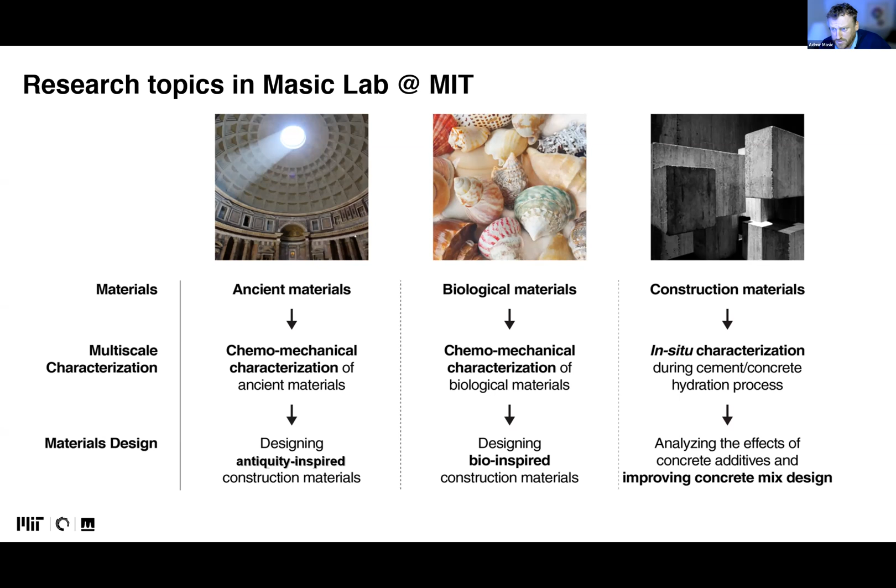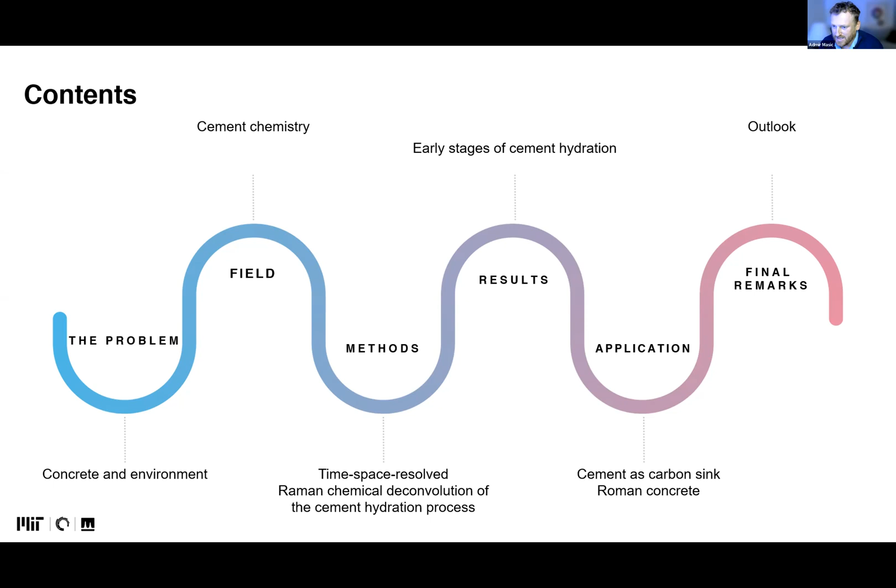So this is my outline, and fortunately there were so many amazing talks today that introduced the problem and talked a lot about cement chemistry, so I will probably fly over most of the introductory slides, and then focus on time-space resolved Raman chemical deconvolution of the cementitious hydration process, which is the method I will present today, and show some results and applications. If we find time, depending how fast I go through these previous modules, I hope to present also some very recent results on Roman concrete structure and properties.

So we learned today that concrete is an outstanding material, and from many talks we realized that we are not gonna go far from what we have now. The reasons are clear: it's strong, durable, and versatile material, and most of all, it's extremely cheap compared to other materials. If you think of, let me just see a pointer, here we go, if we talk about the relationship of cost versus strength, concrete is just great.

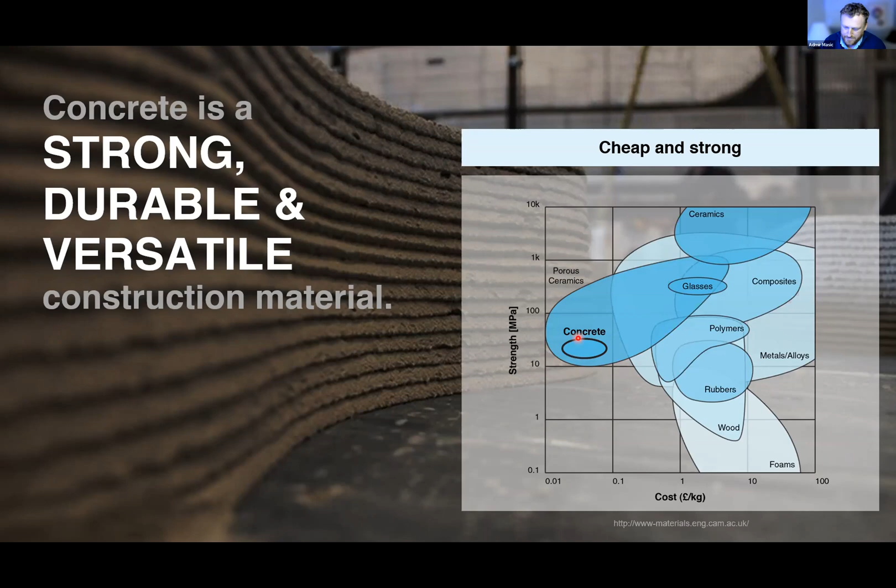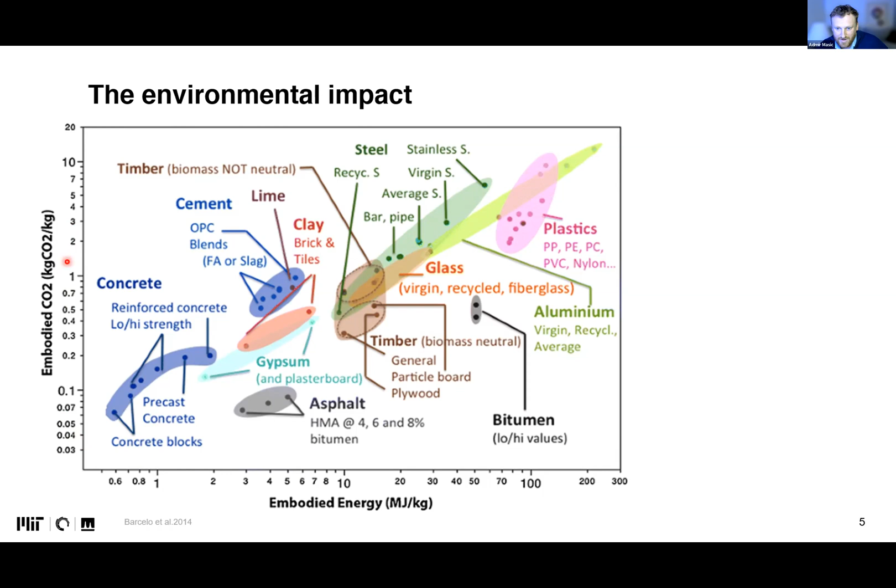Of course, we have seen this slide already in Karen Scrivener's talk, and it's a great material indeed, even from the footprint standpoint. It's on the left bottom side of this logarithmic graph, so remember, logarithmic means huge differences, so it's a great material even from this side. But of course, if we then look at the tons of material that is produced, unfortunately these even small numbers here become extremely high and of big impact globally.

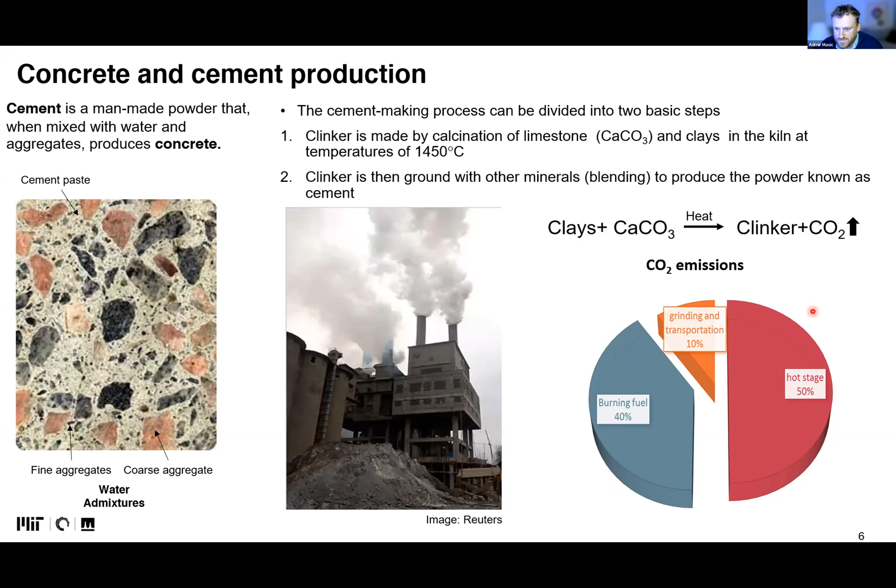So, yeah, we know very well now after this conference, I think, where this carbon footprint comes from. Of course, it's calcium carbonate, limestone degradation that leads to the emission of CO2, and these emissions combined with burning of fuels and some cost for transportation and grinding, in terms of CO2 equivalents, lead to that impact. And the temperature is very high to calcine and produce the clinker, so that's a very, very CO2 intense process.

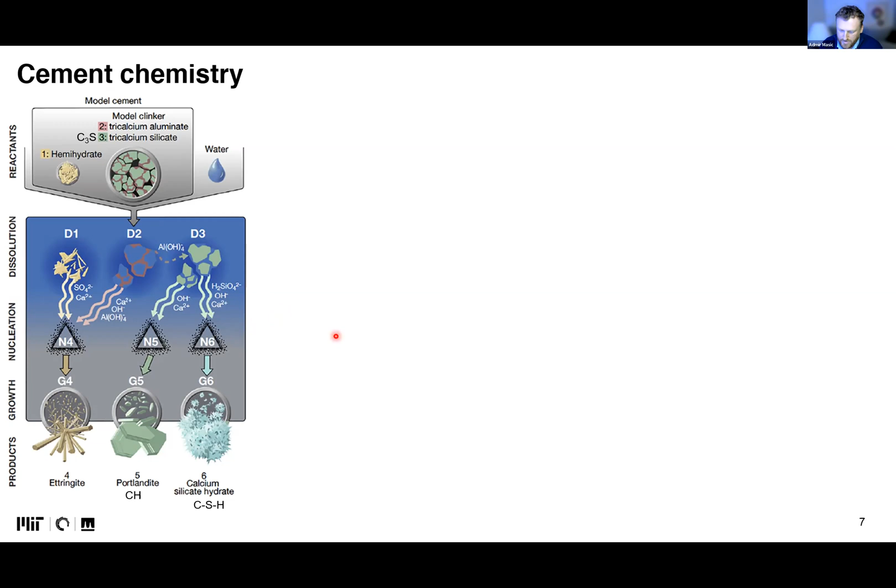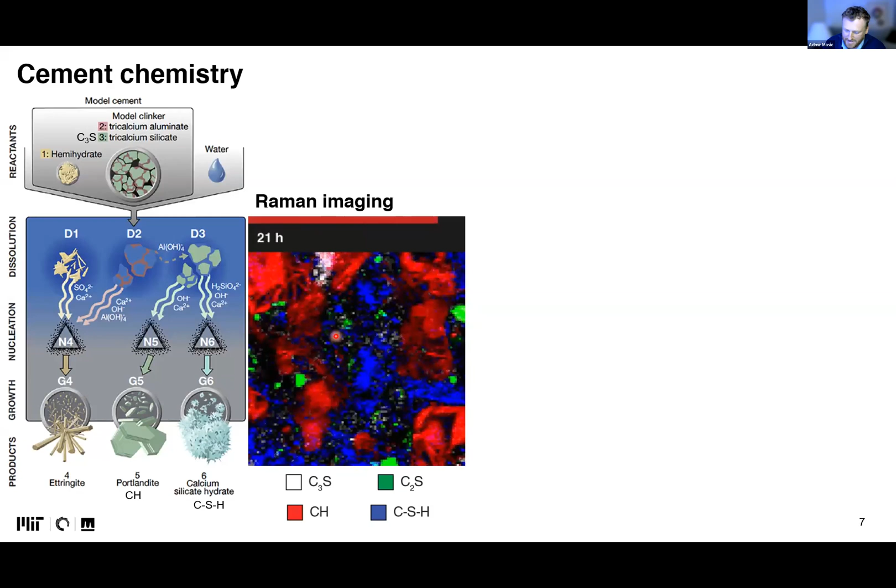The problem is that our modern ordinary Portland cement then takes a route of hydration instead of carbonation, even though you already learned today that carbonation occurs as well. But in theory, what we aim for is this calcium silicate hydrate that will give us the strength, and of course some other products due to additives like gypsum, and there is also belite and so on. We know quite well the chemistry, and it's interesting that we don't know much about early stages of hydration of cement. This is a general representation of concrete hydration, the early stages, where we have a clinker that hydrates, and the CSH is formed and eventually fills the pores and so on.

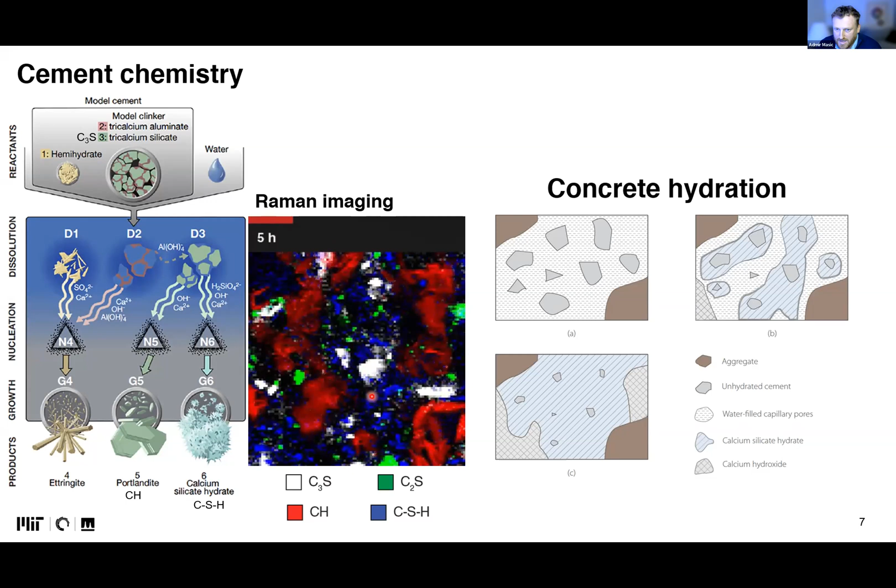Calcium hydroxide is also formed, and these images are from a very recent paper we published where we were able to track all these phases forming across 24 hours. So this is the focus of my talk today.

Of course, you also learned that there are strategies currently being used or under investigation. Some are bold, currently in use, and others are research projects at early stages, where we aim to reduce the carbon footprint of this material.

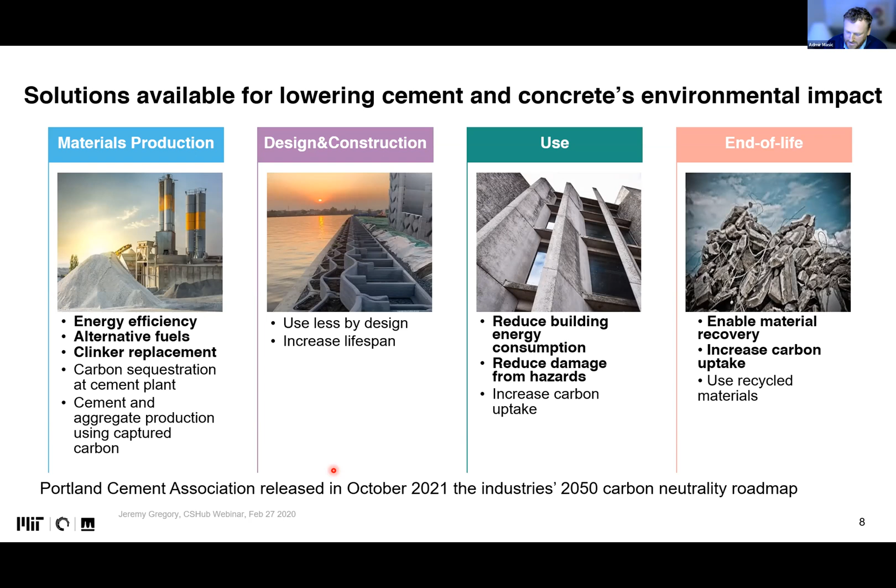I'm really not going to go through this slide, I'll just repeat again that our big challenge is neutrality by 2050 and a half reduction in the next 10 years. Difficult challenge, but this is where I believe we should go when it comes to really making this material sustainable.

I do believe there is a huge room for CO2 to be put back into cement and concrete through CO2 sequestration.

I think we need to improve, doing maybe less by design, so making less and using less material and optimizing design. Many of my colleagues are interested in this, especially when it comes to 3D printing of complex concrete and mortar structures. I think biology is a great place to look for these anisotropic structures, from the nanoscopic scale up to the macroscopic scale, and I think bio-inspired cement is really an interesting candidate, also because biology is specialized to carbonate CO2 and create extremely high-performing biological composites.

So the next point is durability. We need to make our infrastructure more resilient, and I think a great model that we studied in our lab, and I'll try to share some of these results today, is Roman concrete and its self-healing properties. This ancient material has been able to withstand environmental challenges for 2,000 years, and despite its own characteristics, it's still an extremely resilient material that evidently has self-healing properties.

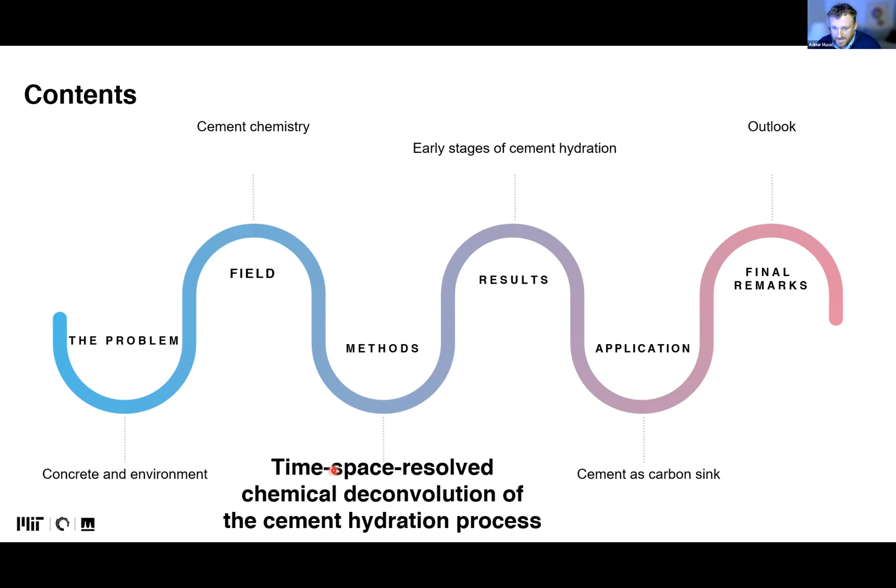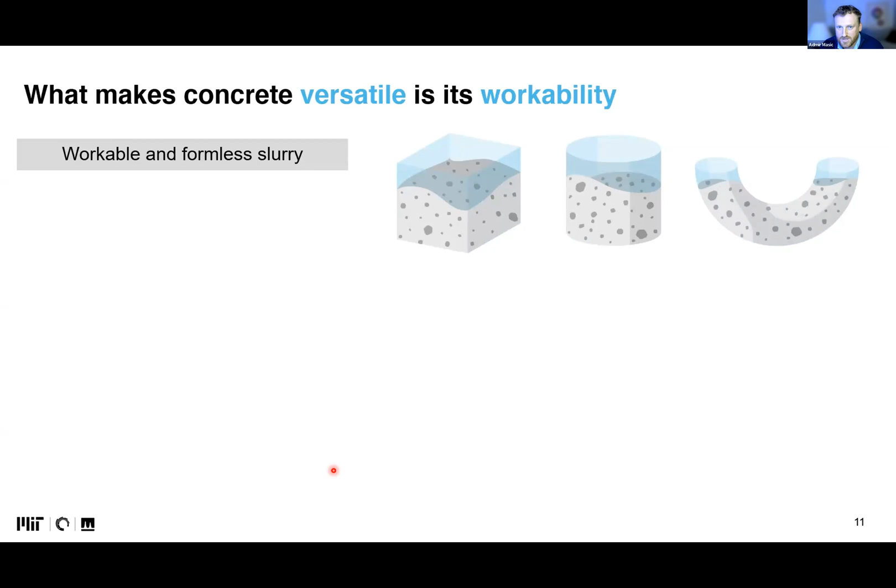Okay, so let me tell you a little bit about time-space resolved chemical analysis, using Raman, of the evolution of the cement hydration process, and why concrete is so versatile - because its workability is really great. You can make any shape from a slurry, and then it hardens into a rock.

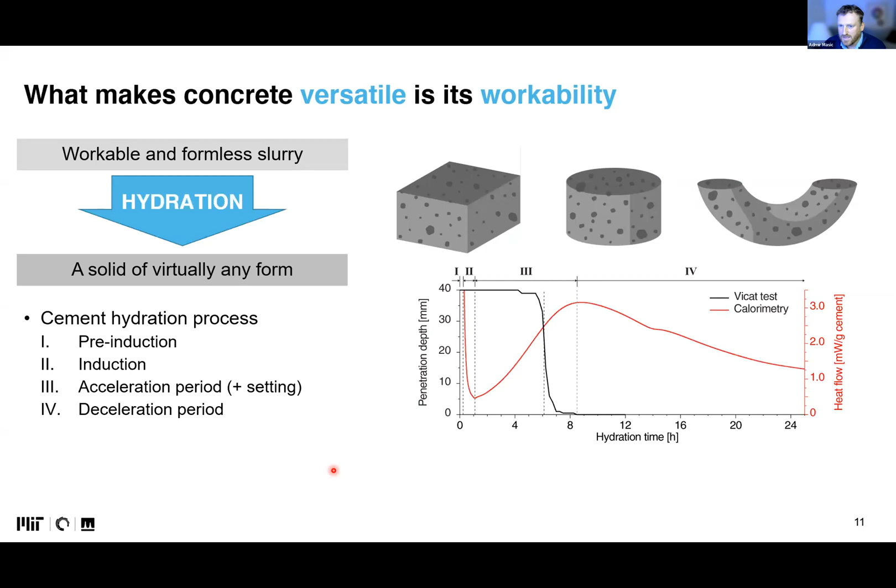Of course, this hydration process that I mentioned is already well studied, with different stages, and we are kind of able to predict when setting occurs. This is from a Vicat test and a calorimetry exam, and setting happens in this case at about 6 or 7 hours, more or less 6 hours.

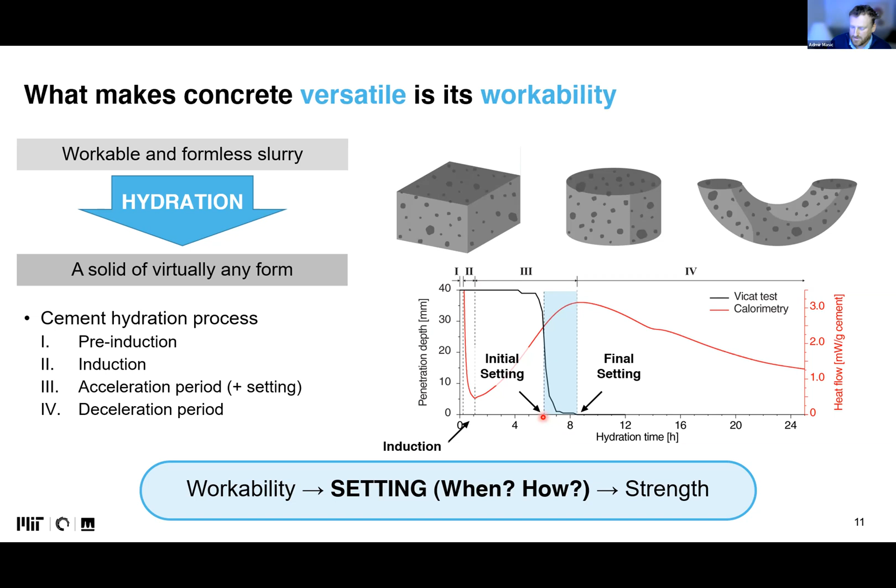The point here, and I like to use this citation from a publication of Henri Van Damme - he says that concrete is a remarkably rich deposit of interesting and contemporary research questions, all contained in its ambiguities: granular or continuous, liquid or solid, crystalline or glassy, smooth or rough, porous, brittle or ductile, material or process.

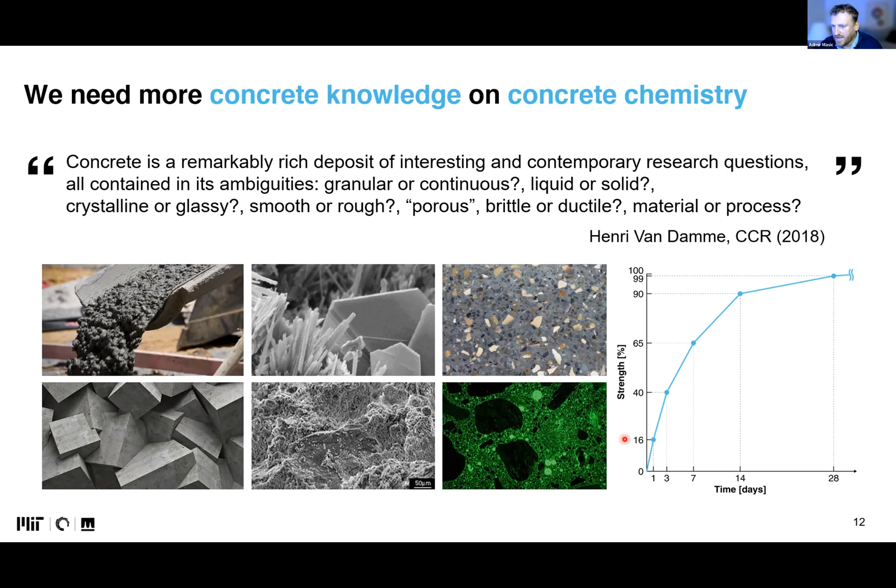So really, there is a huge need for more knowledge on concrete chemistry. That's what I felt when I entered this field from a biomineralization standpoint. I thought we really need to nail down better the processes occurring while this material is evolving in time, going from strength 0 to 100% over 28 days.

So how do we study complex composite materials? They are multi-scale, hierarchical. We've heard so many times today about nanoscale, macroscale, and mesoscale, and the multi-phase nature - there are many phases. We also had a great talk from Claire telling us how difficult it is to really predict properties based on composition that is very heterogeneous. And unfortunately, on top of this, it's also changing.

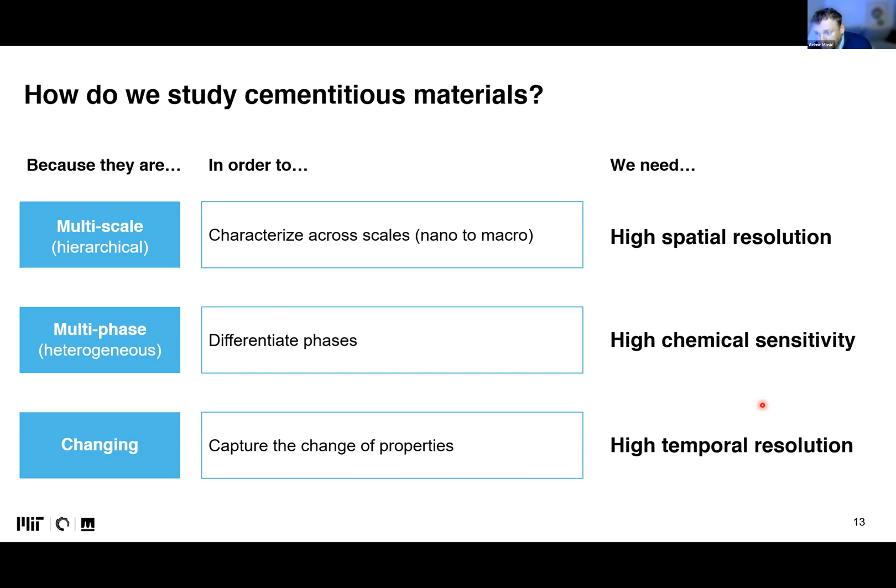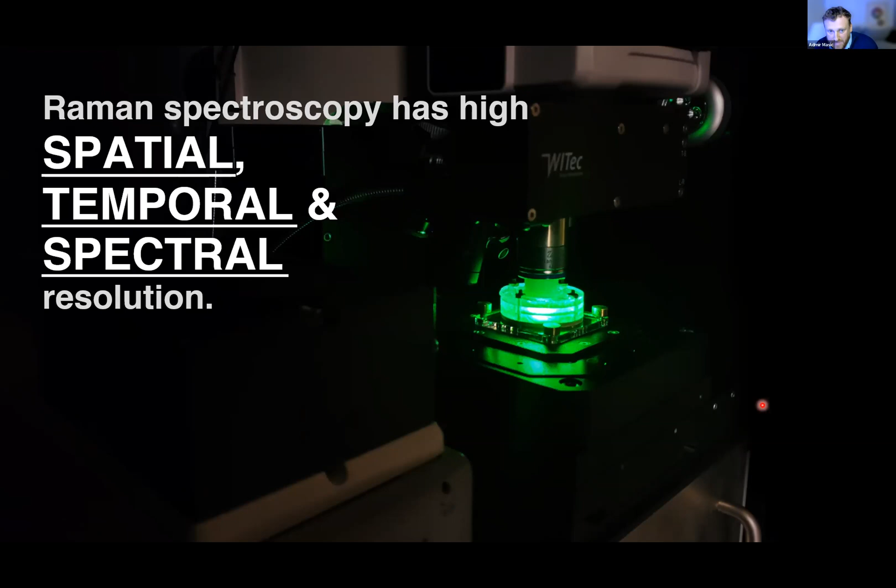So what we need is really high spatial resolution, high chemical sensitivity, and high temporal resolution, to actually capture all this in one shot. And you'll realize that there is a tool called Raman Spectroscopy that has high spatial, temporal, and spectral resolution to tackle this problem. Just for our undergrads here in the audience, Raman Spectroscopy is a technique that basically probes molecules and molecular vibrations.

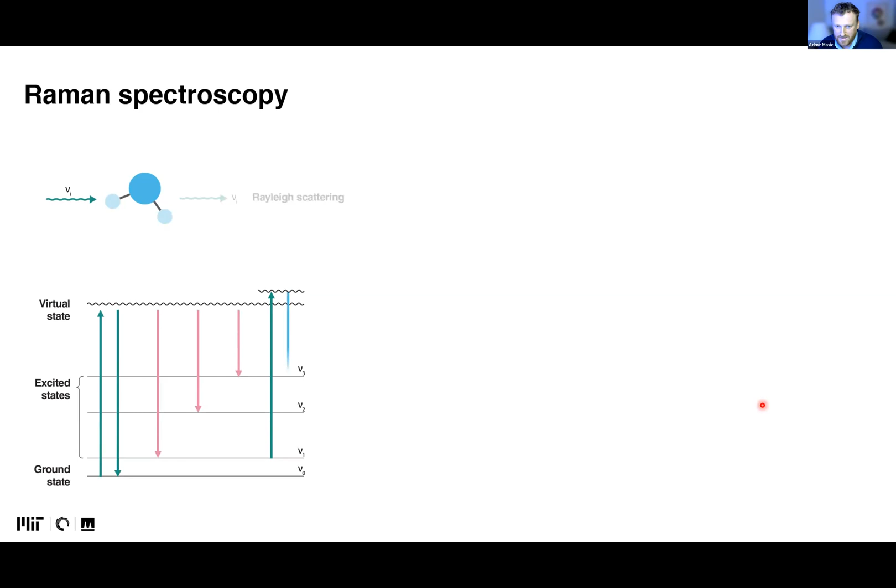We shine a light, a photon, generally a laser, on our sample, and this sample gets excited, and through the transformation from ground state into virtual state it relaxes, but some of these relaxations are accompanied by an inelastic scattering of a photon of light that now carries a shift.

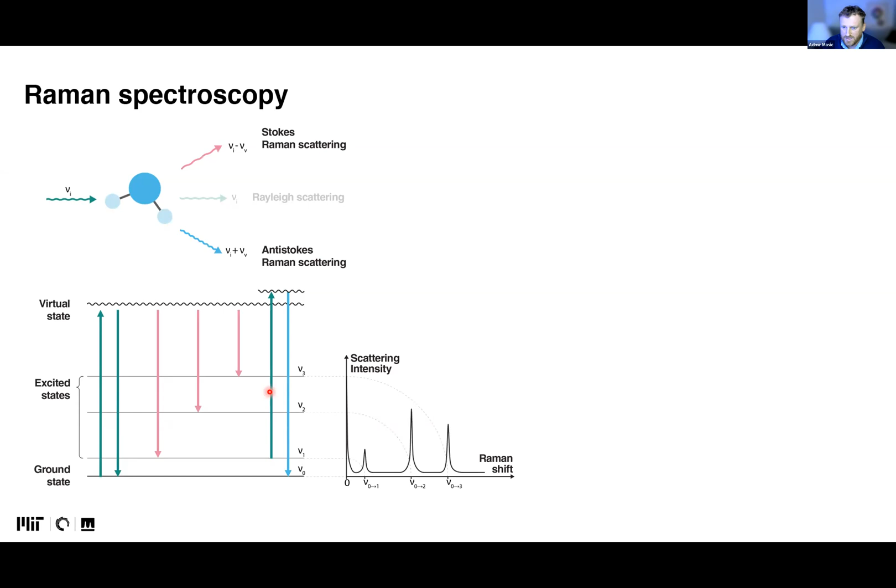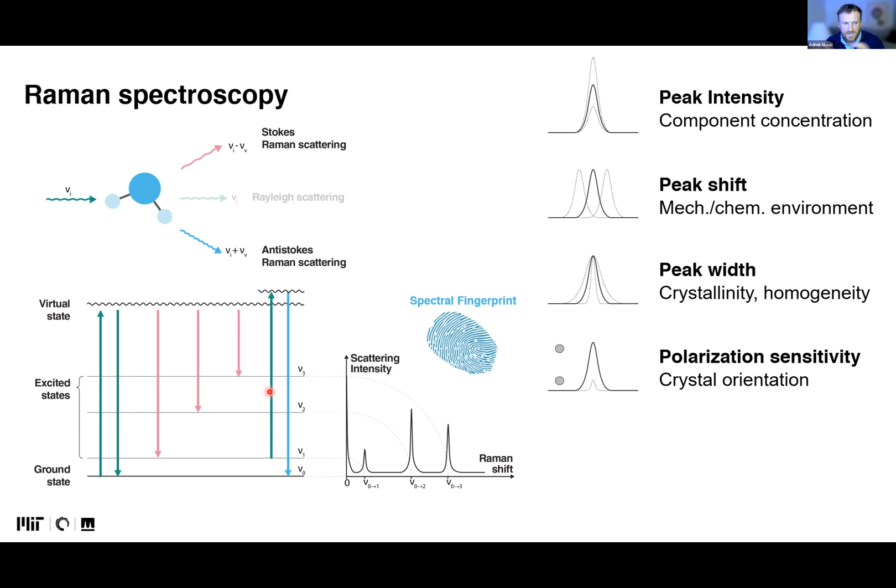These shifts, these differences in light energy, give us a fingerprint for each material we investigate using this tool. That fingerprint carries a lot of interesting information that is very local around that vibrational unit—molecular information, short range order interactions that are evidenced in these spectra: peak intensity, peak shift, peak width, polarization, sensitivity. All these details about the peaks inform us about the unit that is vibrating.

You see from this big slide that I've spent some time using this tool to look into many different materials. It's more than a decade now that I'm using these tools systematically to study biological and man-made materials. Here are bones of a zebrafish, a recent paper on nacre, the giant squid sucker rings, and the composite material on the surface of the clubs from stomatopod smashers—this is part of what I'll be showing you. Here is mineralization in breast cancer, and this is Roman concrete and cementitious material. Let me focus on this bottom right part of this complex slide.

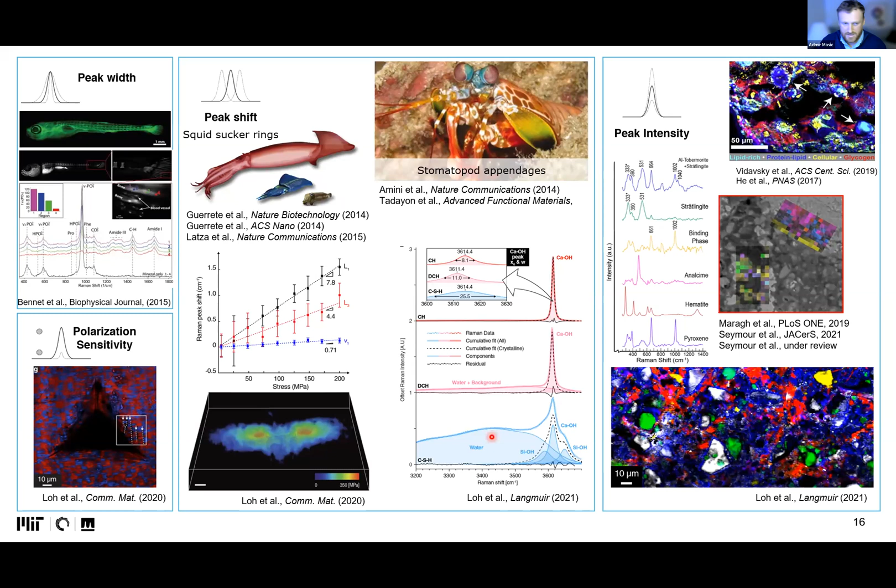Here, Raman spectroscopy and cement chemistry. Raman had limited applications due to poor signal to noise, and generally because cement is very heterogeneous, we learned that often there are trace metals that would absorb laser and then emit a fluorescence signal that would cover the entire spectrum. Indeed, here we have signals where one spectrum gives us these hydration products.

Quite challenging experiments were done in the 70s and 90s, but then with optical microscope integration, and especially with confocal microscopy, we were able to focus this laser to a very small volume that eventually, with a limited amount of these trace metal elements or other sources of fluorescence, allowed us to get this.

We're talking about 2019 and 2021, so very recent work. The cool thing about this most recent paper is that we do it under water conditions, meaning the processes occur very similar to what they would do in real world conditions. So we call it operando.

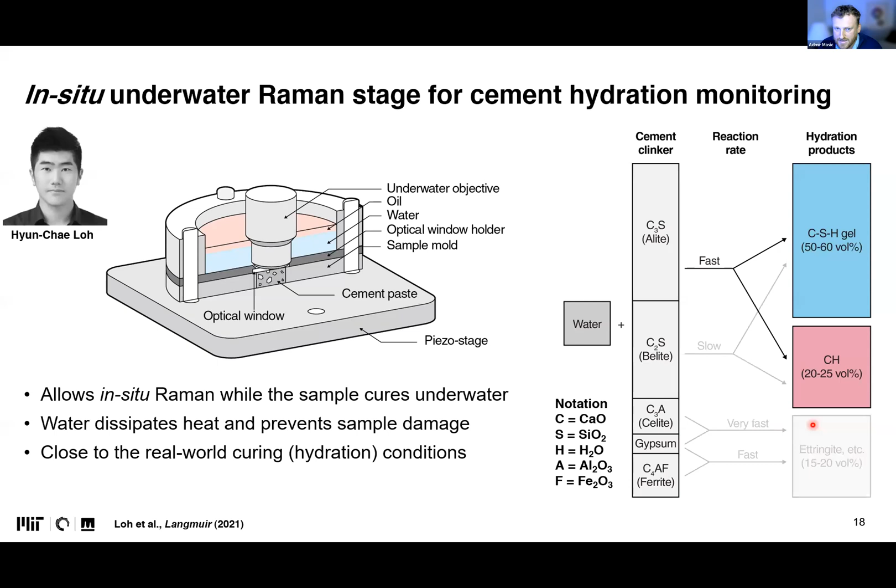What we can do is basically monitor most of the initial chemistries and then also eventually understand the hydration products. As I said, Chae definitely spent some time developing the method outlined in this paper. So we can do time dependent measurements—it's a 4D data structure: X, Y is for space, time, and wave number is another dimension.

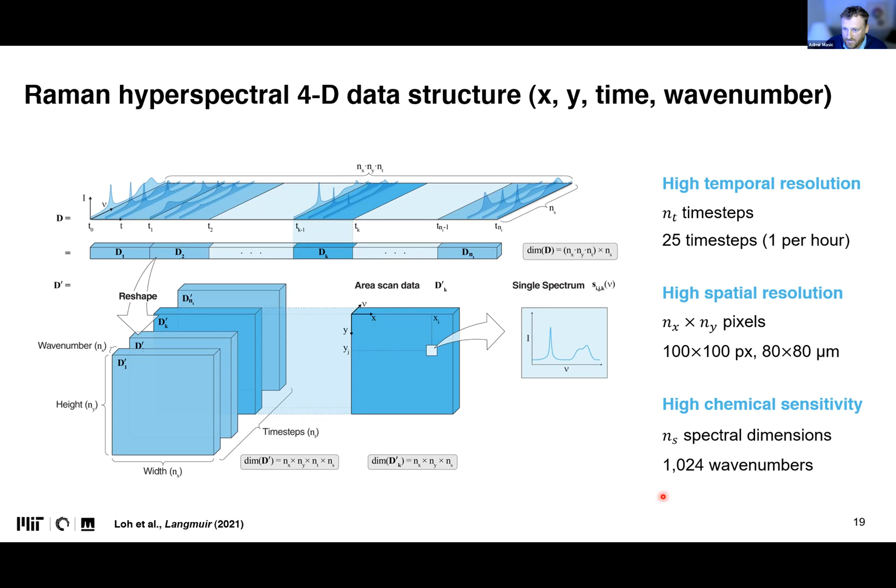So we can get a lot of information, and in general we collect it quite quickly, at about 300 milliseconds for each of these spectra. This basically allows you to go really fast and get thousands, hundreds of thousands of spectra, which is really valuable for statistical purposes.

We can also post-process these cubes to get basis spectra, which would look something like this, and each of these has specific characteristic peaks of molecular unit vibrations that give us that fingerprint for each of these molecules, including water, of course.

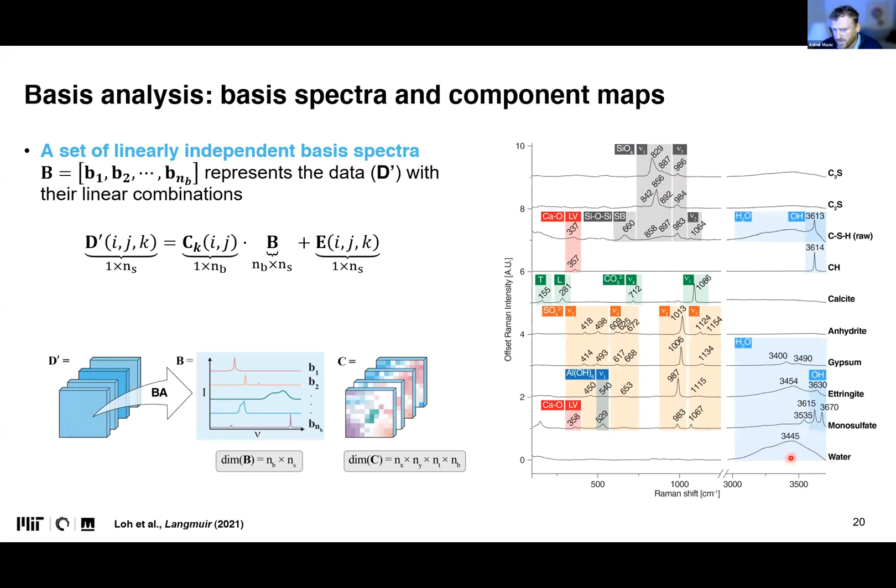So we can focus and look at the peak profile, for example for chemical environments. You learned before that peak position and shape will inform on the environment, and if we focus here on our spectrum of CSH—I like that—and also CH, calcium hydroxide...

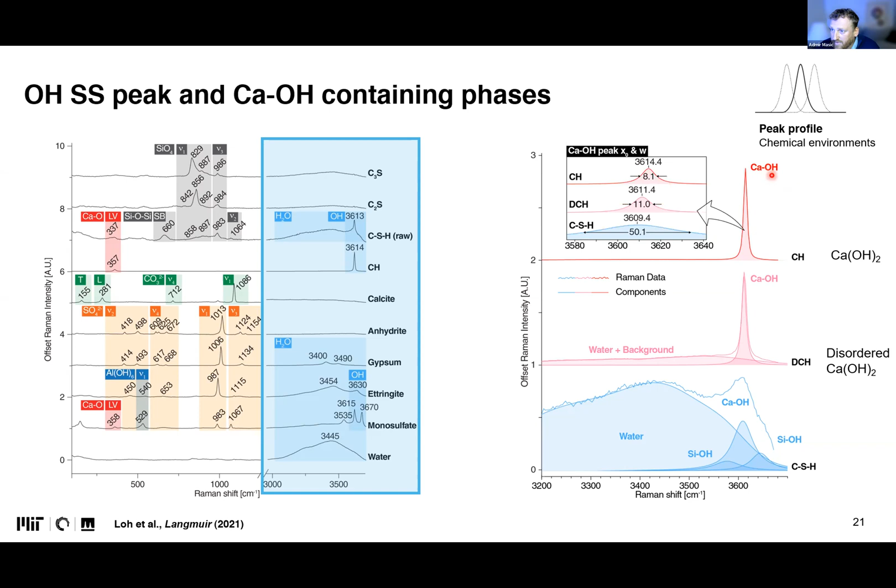We will notice by careful analysis of these peaks' position and shape that the OH peak associated with calcium hydroxide, typically very sharp when it crystallizes nicely and is at about 3614, shifts in some of these stages and broadens. This basically tells us that the structure in this intermediate state is not yet crystalline, but somehow disordered, which is immediately picked up by this peak position and width.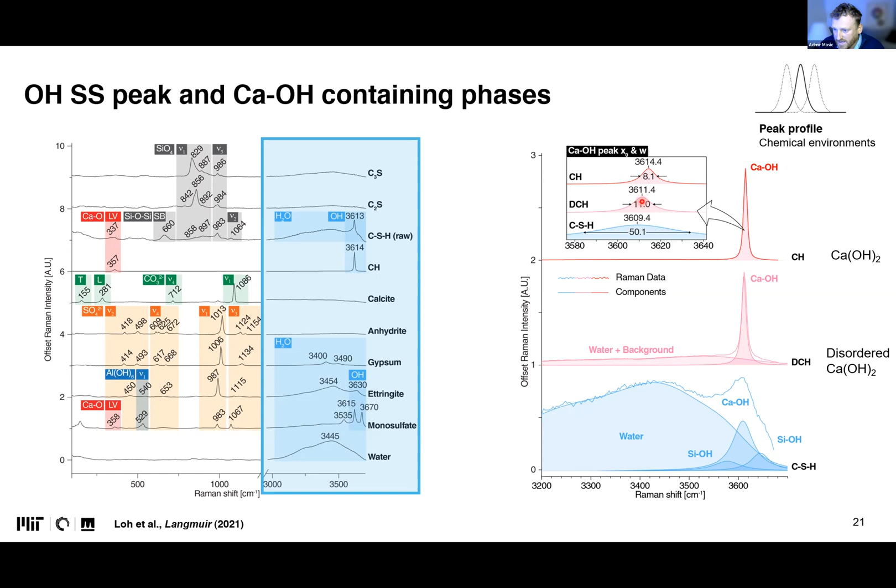That then allows you to plot the position of the peak and the width, which we can extract through peak fitting of that specific peak.

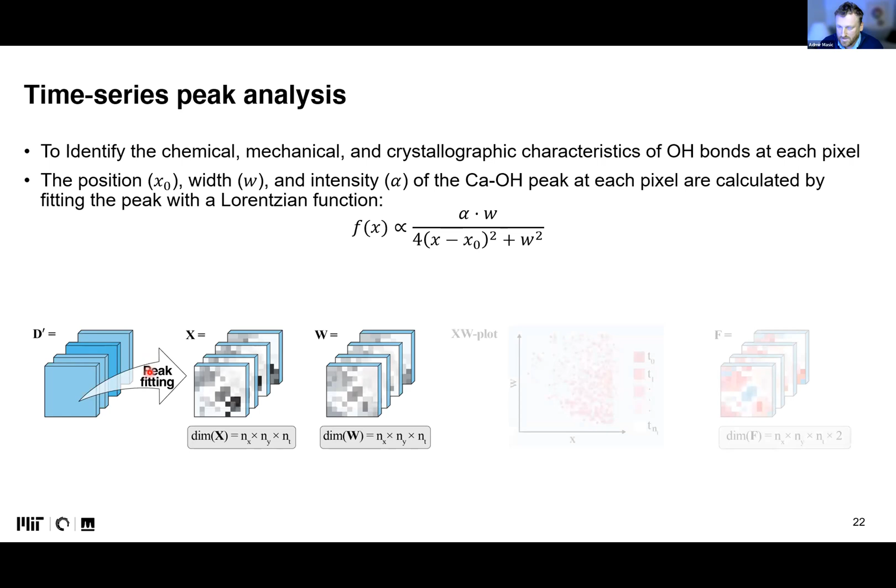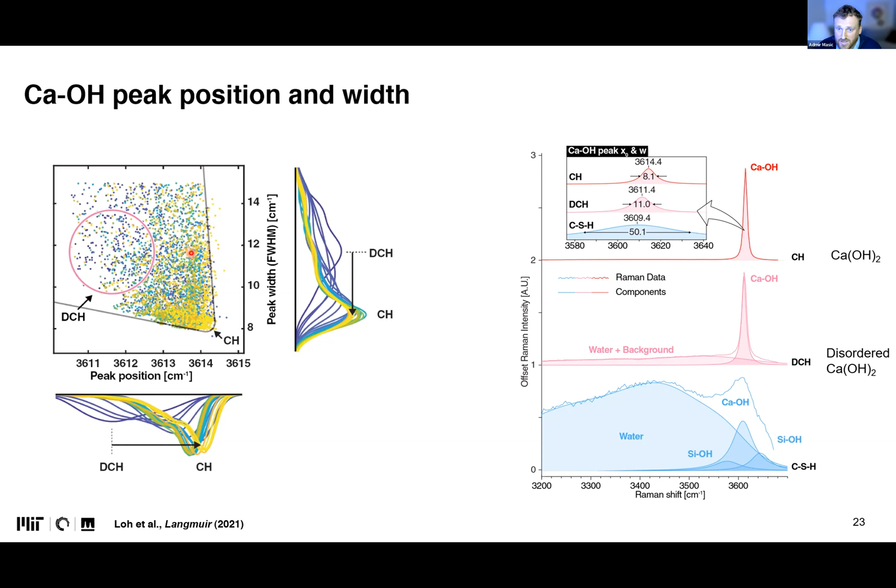We plot the data and get results like these, where you see peak width on Y and peak position on X moving as time proceeds. At 14 hours, 15 hours green, and by 19 hours we moved to a specific peak position and width, whereas we started with disordered calcium hydroxide. So this is a very sensitive and spatially resolved tool.

If we look at this broad peak that remains underneath the calcium hydroxide, we notice this is a peak of CSH, broadened because it's disordered in general. Using this deconvolution, we were able to confirm the Gartner's model for defective tobermorite CSH, at least in this specific case we studied.

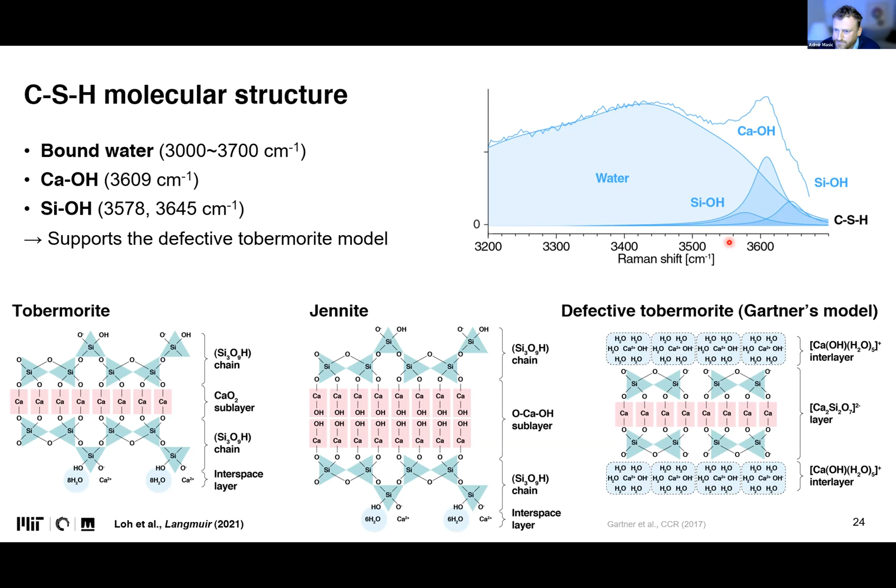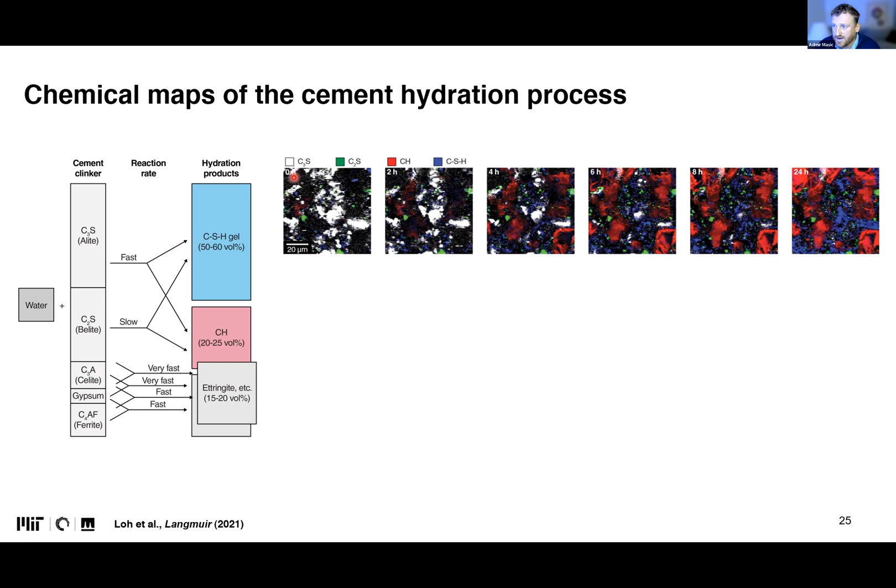And here is the standard ordinary Portland cement sample. The cool thing is that we can get spatial resolution, not only temporal and spectral. These are snapshots of that video, and you can nicely see that in this corner, there's a lot of calcium hydroxide forming inside, and you can analyze this through correlation functions.

You can get the volume fraction, cluster size in microns, and characteristic distance by analyzing these images. What we found is that calcium hydroxide crystallizes far from C3S alite clusters, which is to be expected, and CSH crystallizes on the surface of alite. Setting occurs when C3S, CSH, and CH calcium hydroxide form an interconnected network, which is really obvious from these data.

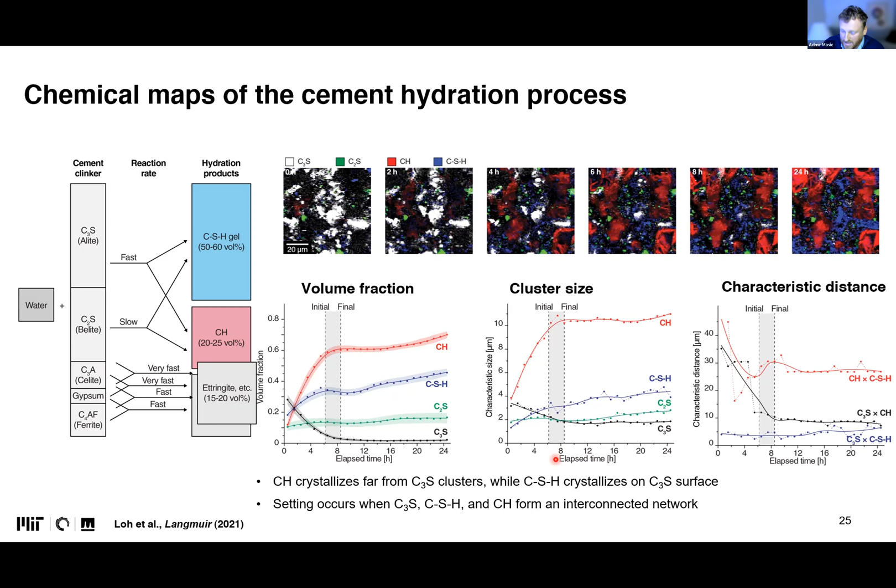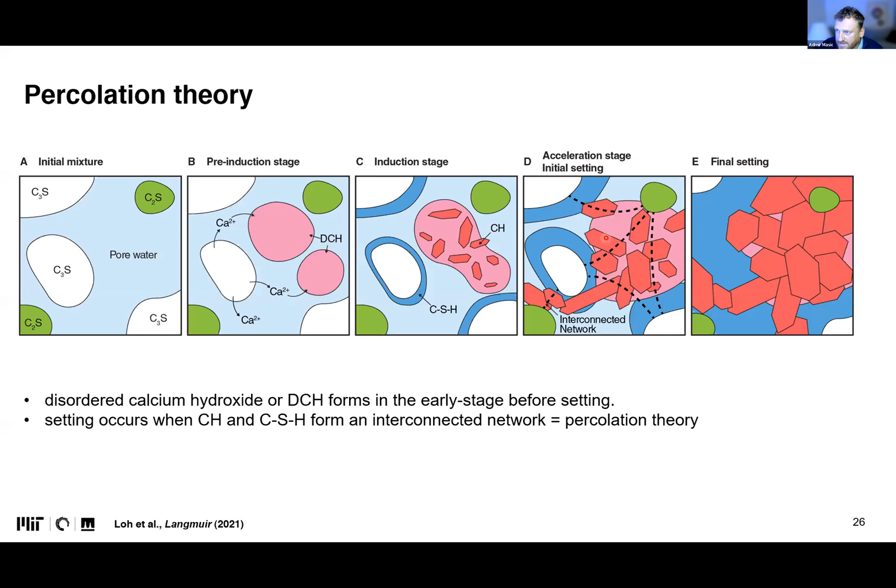This is the model we were able to outline: what is quite new and cool is that calcium, once created through hydration of alite, moves into pores as disordered calcium hydroxide, then crystallizes, and grows with time. When everything is connected, we get setting, at about 8 hours.

Chae did a further push and analyzed the same sample over a longer time, our magical 28 days, when the strength reaches its maximum. We can nicely see that green is belite, which doesn't do much until a certain point and starts to react around 7 days, so we see some reactivity, whereas alite is gone, and a lot of connected CSH is formed.

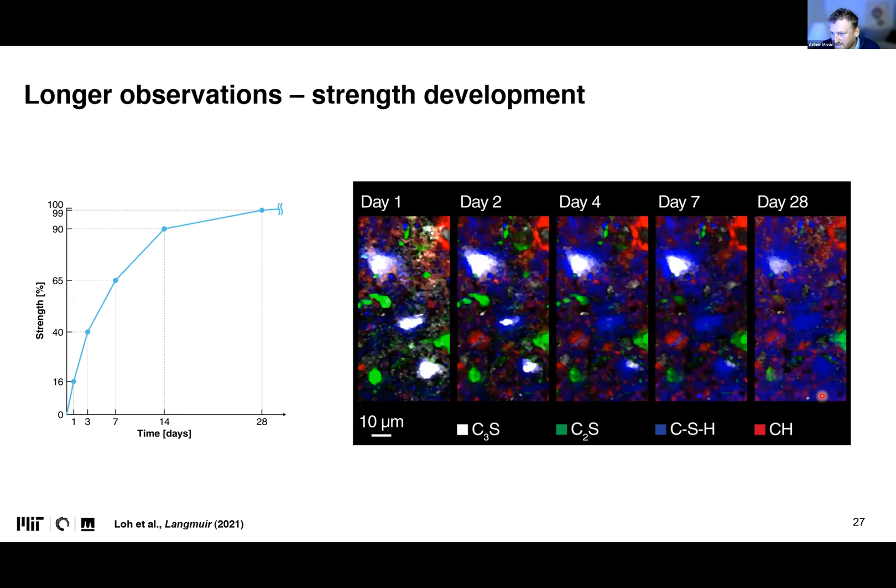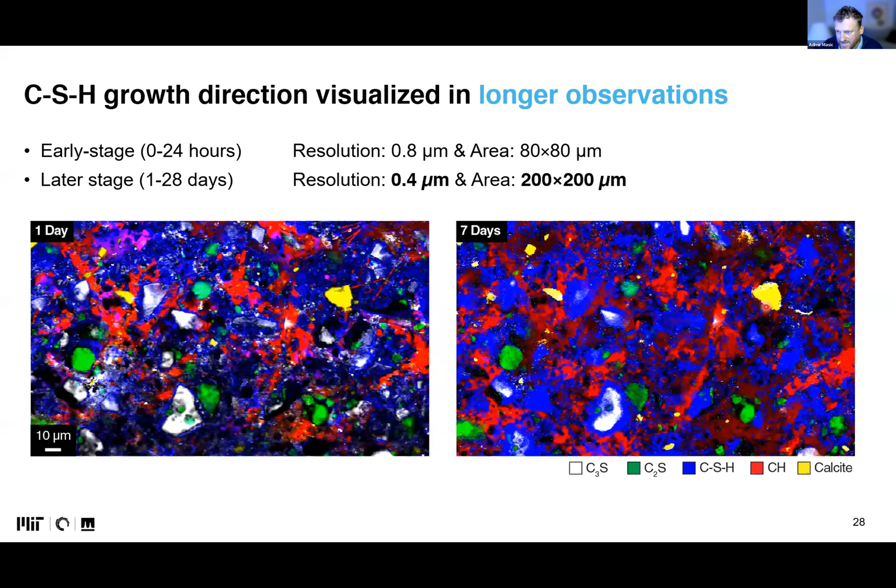This is the kind of image you can get. I introduced this slide simply to show that there is calcite - we can put some calcium carbonate inert material there, and then have some references, but also, in perspective, we'll see this can be easily studied.

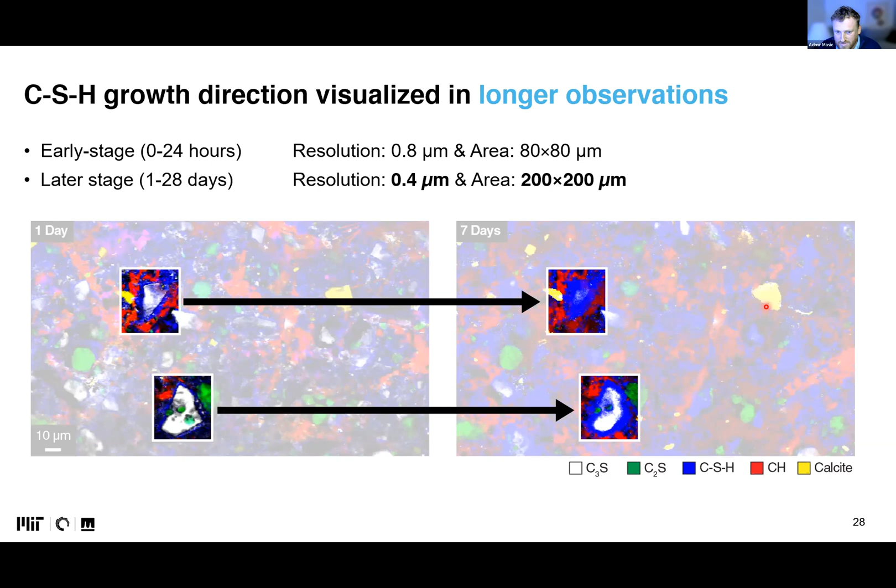Here we can see that after 7 days, alite is basically consumed in one grain, but still present in another, and there are different parts of CSH that are formed - one that goes inside the grain, another that grows on top of the grain. So you can do all these kinds of investigations.

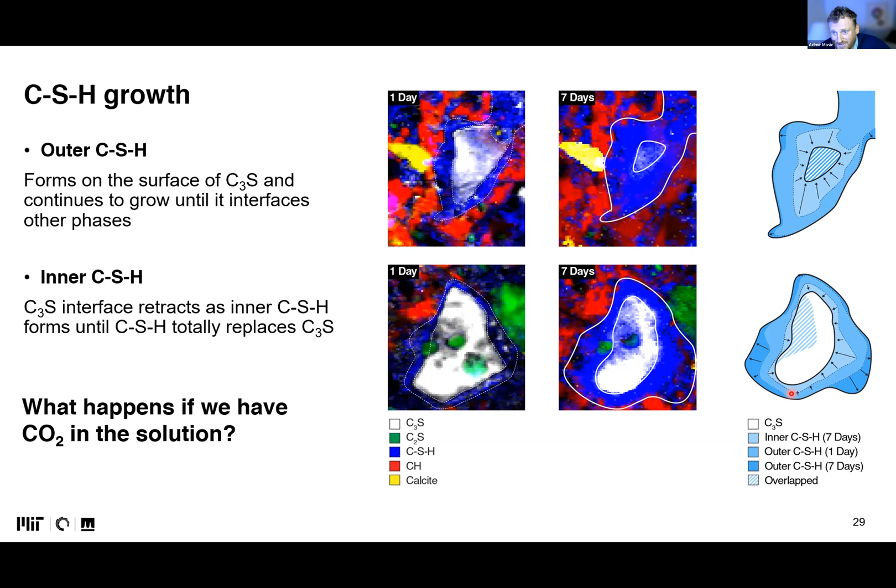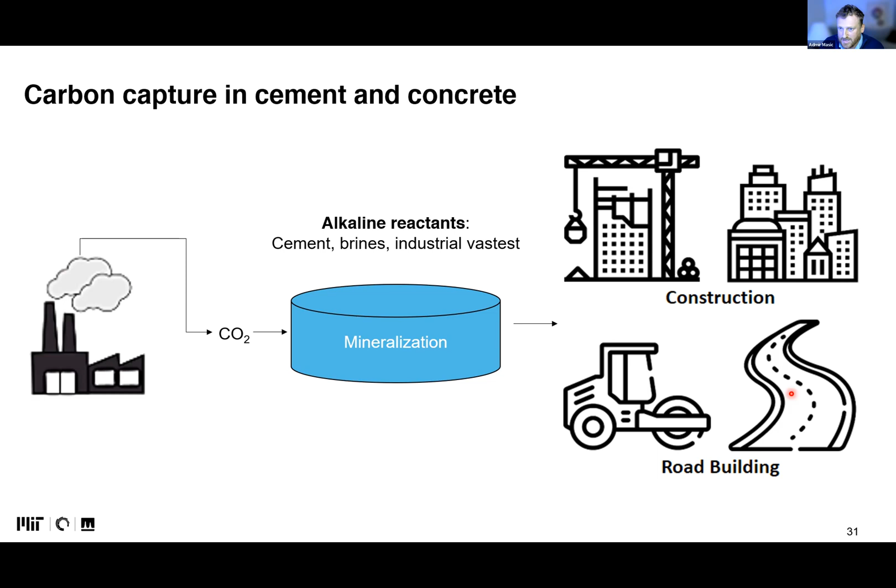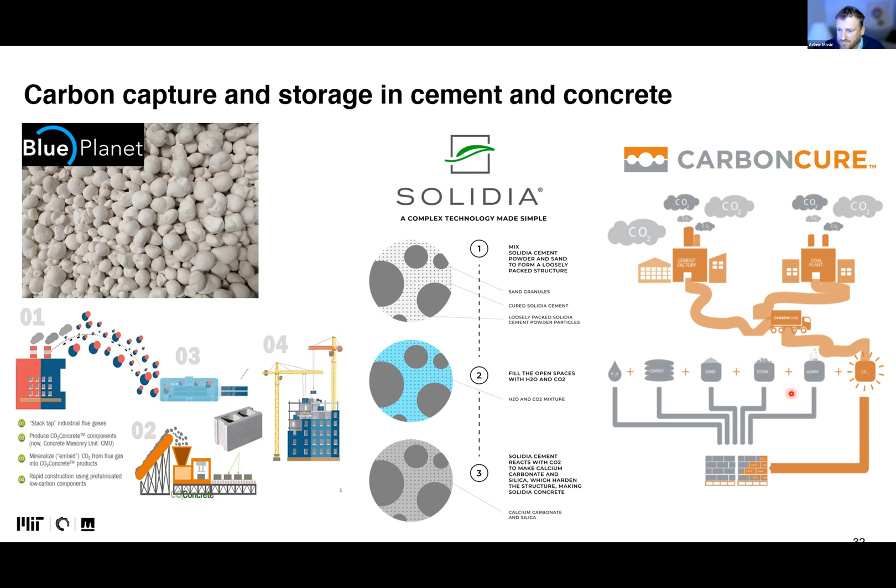And indeed, what happens if we have CO2 in the solution? That's the question that connects nicely with the objective to use cementitious materials as a carbon sink. There is so much enthusiasm around this work, and I think there will be a lot of progress here - these are just a few of the companies and startups I picked from the internet, and you probably know them well. It's very much about how we can move anthropogenic CO2 into the material and keep it there forever, permanently.

And what I've done with my colleague, my student Marcin, we monitored a little bit the hydration of C3S using a similar setup together with bicarbonate, and what was really cool here is to see carbonation clearly overlapping with CSH formation.

Red and blue overlapped means pink, and basically if you see pink in this image, you know these two are always together. That somehow connects with talks we heard today about calcium carbonate formation, calcium carbonate seeding for CSH formation, and I think here we are opening an incredible opportunity.

We're opening an opportunity for investigating clear microscale reactivity of CO2 in a complex cementitious material, because now you could imagine that while C3S is hydrating, it will produce CSH, but also calcium hydroxide. Calcium hydroxide will interact with CO2 - where is it interacting, at which stage, which phases are involved?

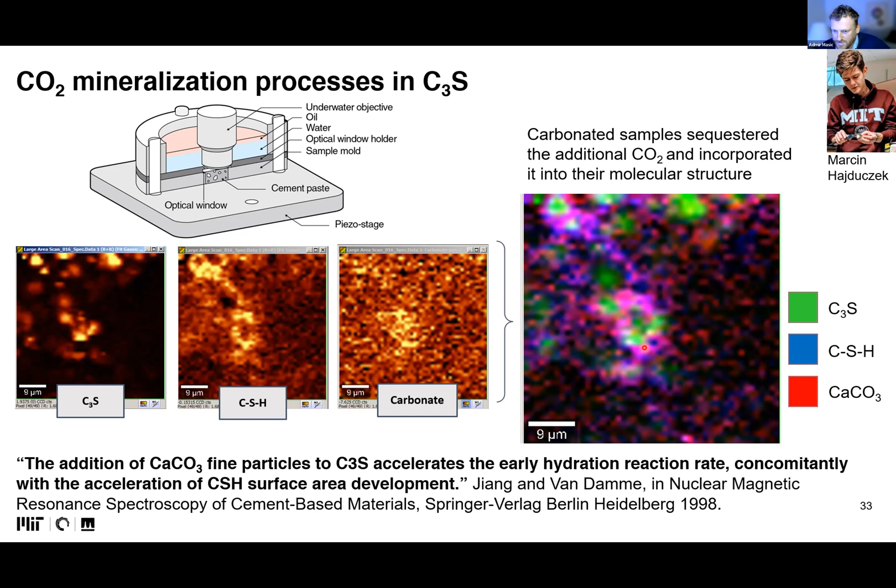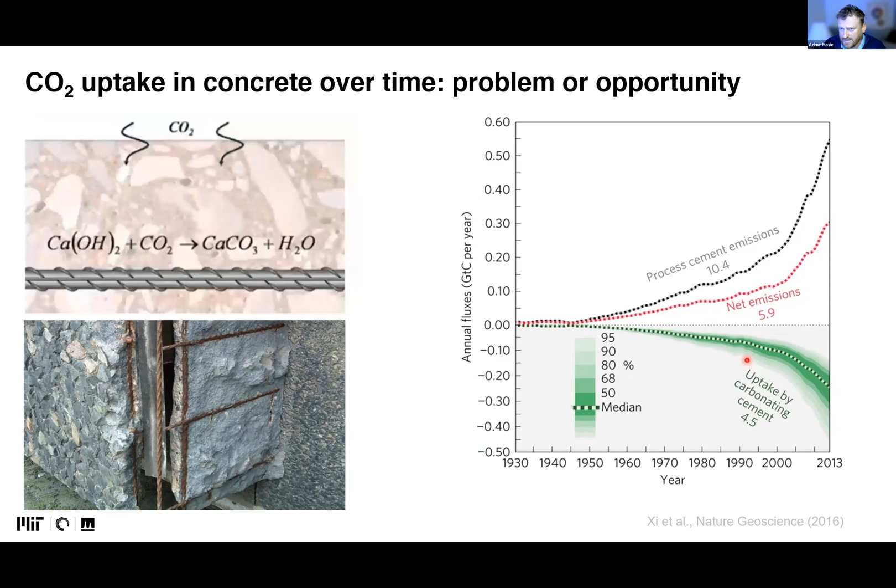I'll return to cite my friend Van Damme, who published in 1998 that addition of very fine calcium carbonate particles accelerates the early hydration reaction rate. We see this also through many recent works on pumping CO2 into fresh cement. But we also learned today the other side of this, how CO2 will eventually play a role in degradation. Still, encouraging numbers from modeling show a huge uptake by carbonating cement over the last 5 to 10 decades, so this is definitely something we should look more closely into.

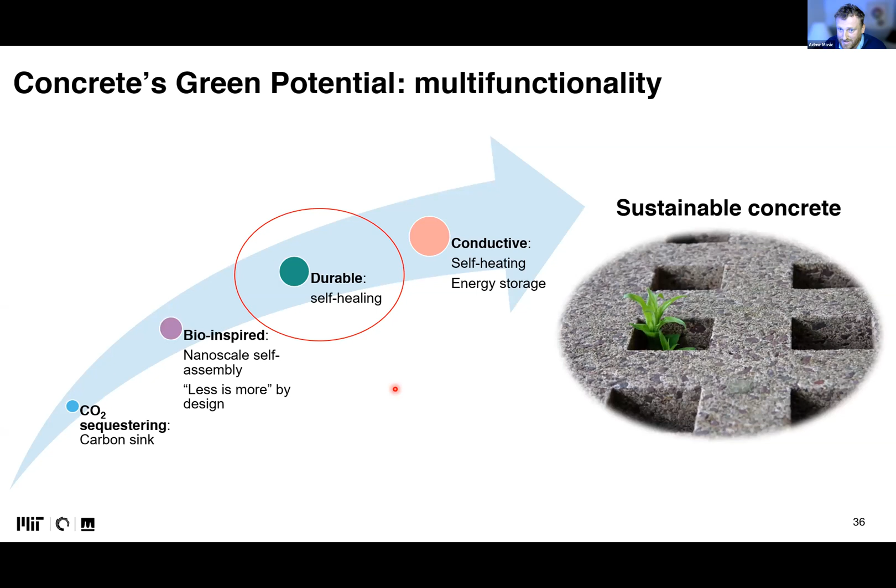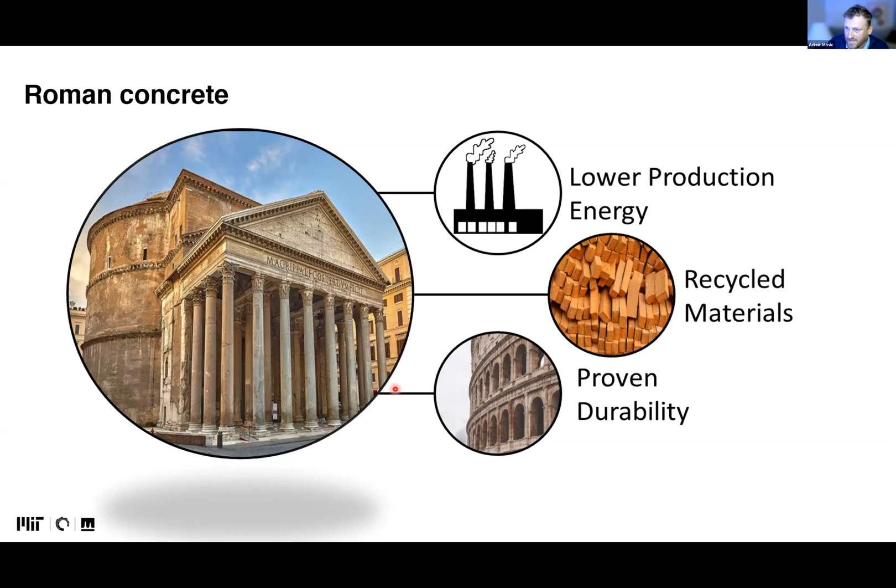As I said, Roman concrete is not only extremely durable, but it often uses recycled materials and requires less energy to produce, so it's worth looking into. Generally it's a mix of volcanic ash, sand, aggregate, and lime, mixed with water, creating this hydraulic lime cement that binds sand in the mortar, with big aggregates then doing the shape. Of course, hydraulic mortar means we have this pozzolanic reaction that, because of the type of volcanic ash used, produces Roman cement—we get calcium aluminum silicate hydrates.

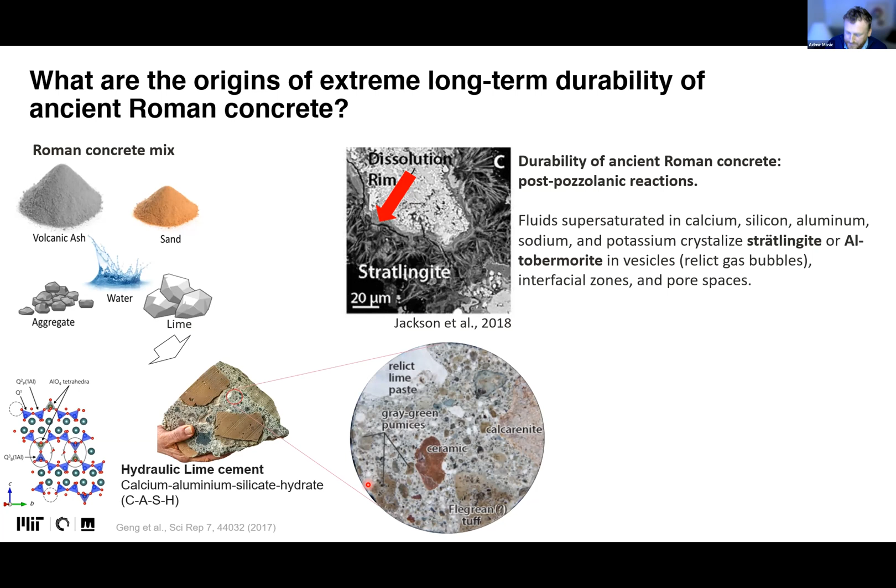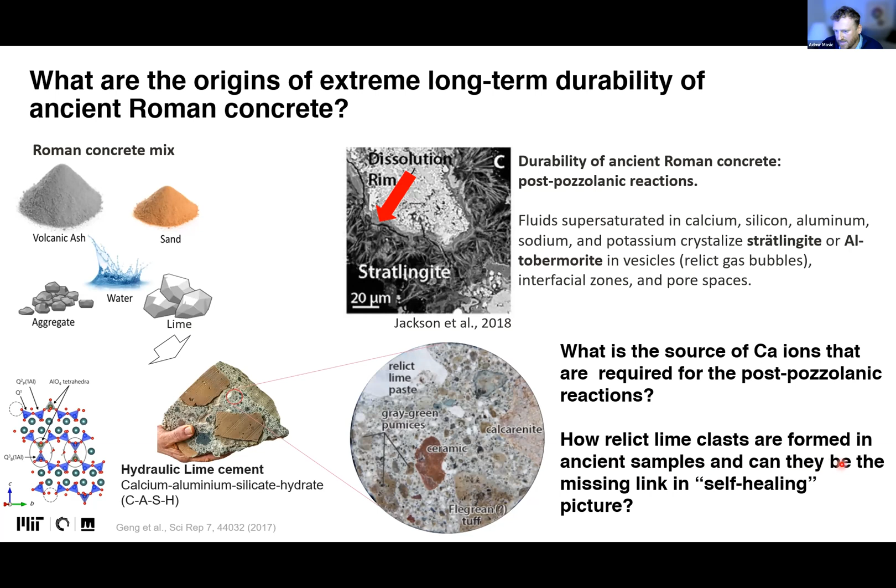Durability is of course of our interest, and it's very well studied by my colleague Marie Jackson. She demonstrated through several works that fluids supersaturated with calcium, silicon, aluminum, sodium, and potassium, eventually after the pozzolanic reaction occurs, crystallize over the long time scale into phases that fill the vesicles, relict gas bubbles, interfacial zones, and pore space—basically filling everything. One important question we asked in our lab is: what is the source of calcium ions for these post-pozzolanic reactions, and how do relict lime clasts, which are ubiquitous elements of Roman concretes—here's one of those white chunks—how are these clasts formed in ancient samples, and can they be a missing link in self-healing pictures? These are the questions we asked.

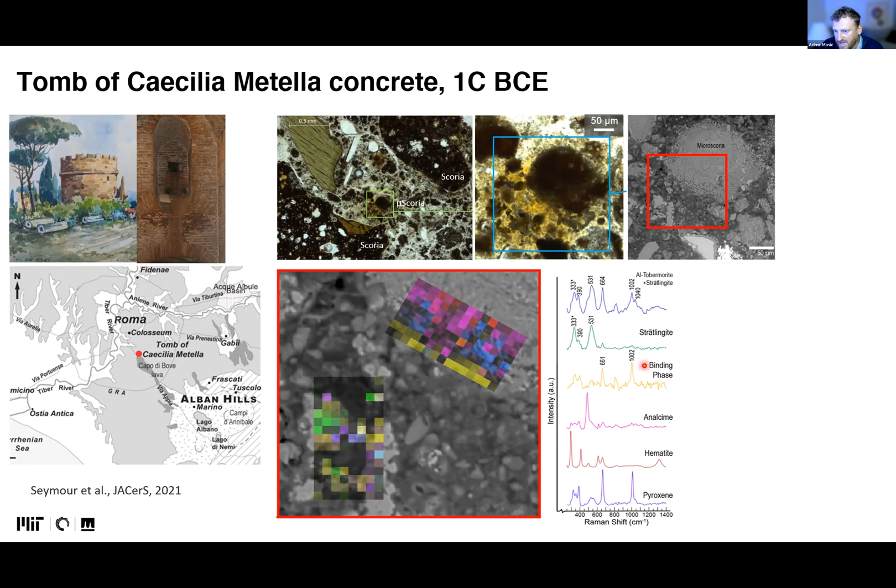Here is a recent paper we published on the reactivity of these volcanic components, nicely studied using Raman spectroscopy, where we were able to identify aluminum tobermorite and strätlingite in the Roman part's interfacial zone, but also CaSH as a binding phase at the interface. This eventually led us to confirm the extreme reactivity over a long time of the interfacial zone, and it looks like it's constantly evolving through long-term remodeling.

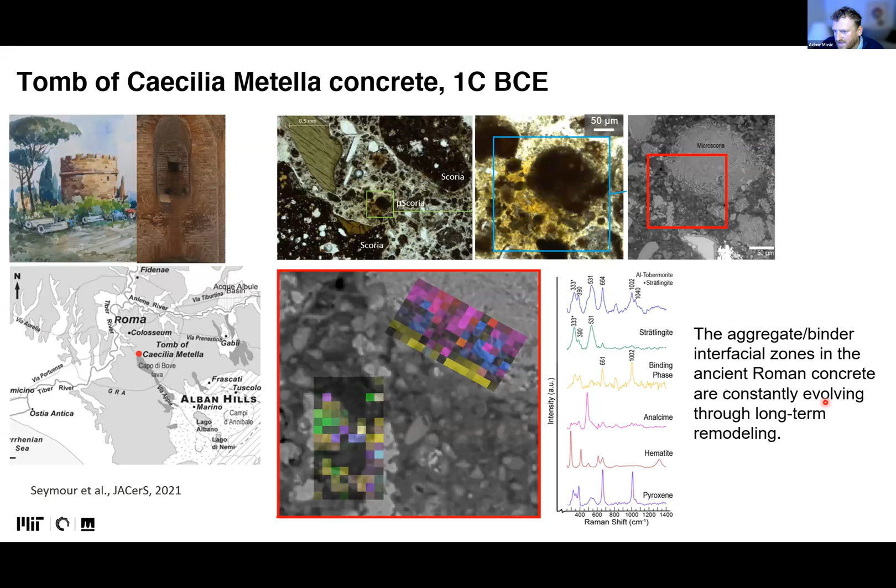Another paper about to be published tells the same story, but now with materials we make—so-called cocciopesto, ceramic man-made materials that were introduced when volcanic ash was scarce, for applications in water-related infrastructure like aqueducts and thermae. In this case too, we observe the same reactivity of these now anthropogenic, man-made inclusions, through very similar reactivity.

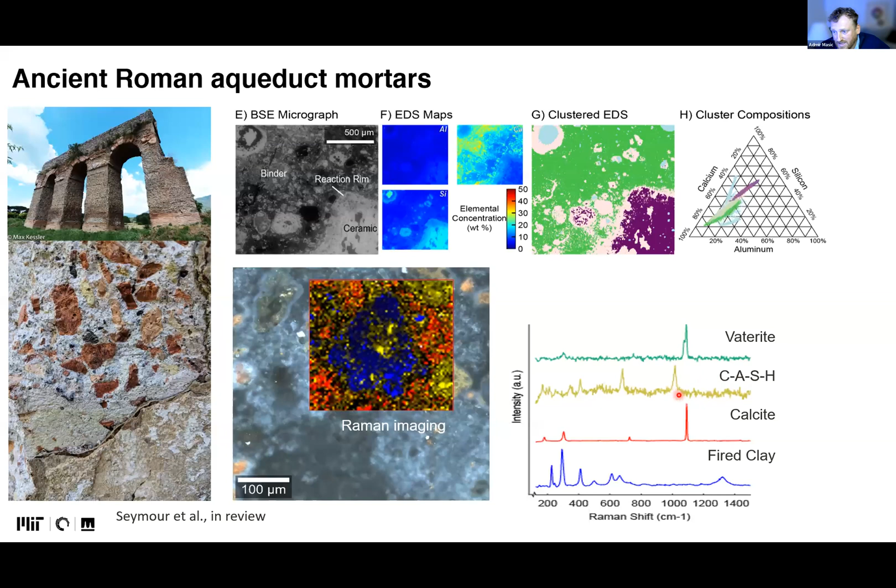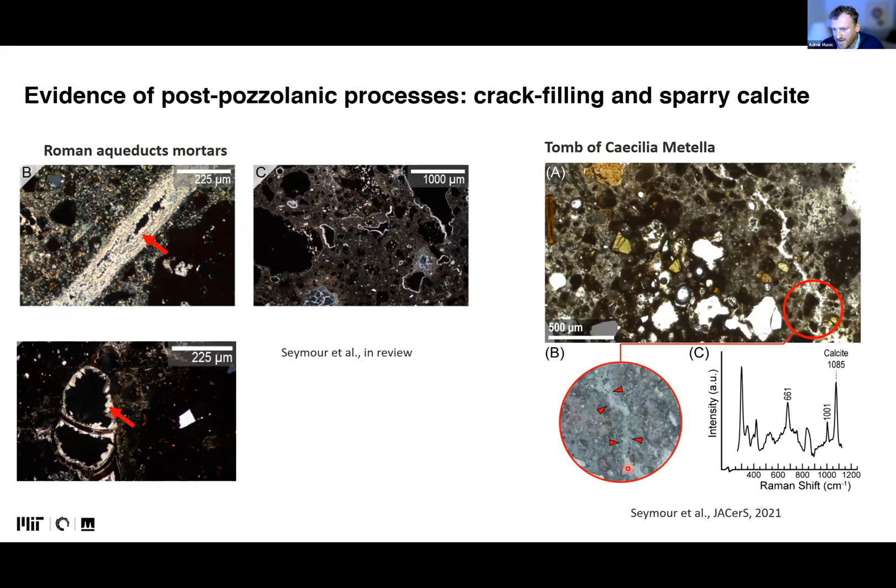We observed CaSH and calcite. What we also observed, which connects to the next point, is that there's a lot of calcite everywhere, including in cracks—you see this crack here, it's filled with calcite—and that actually fits very nicely with what we explored in the lab.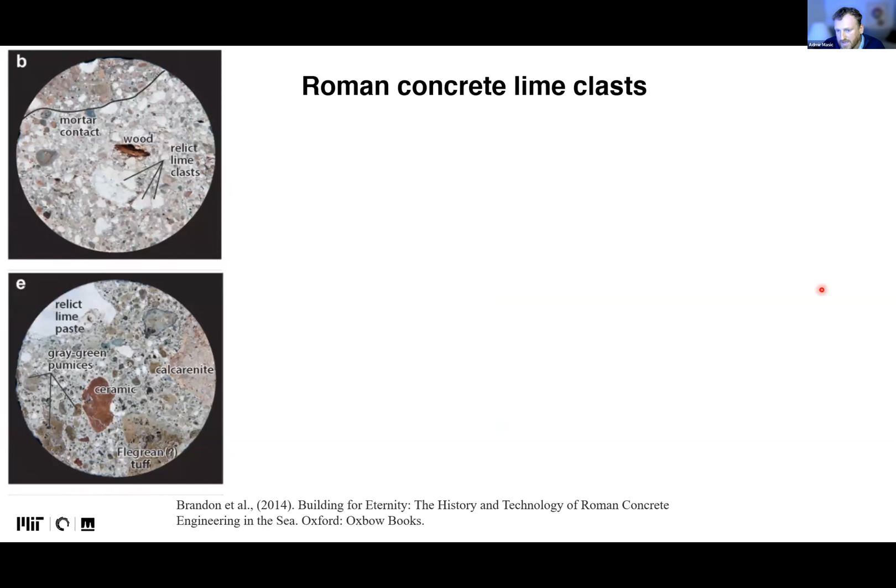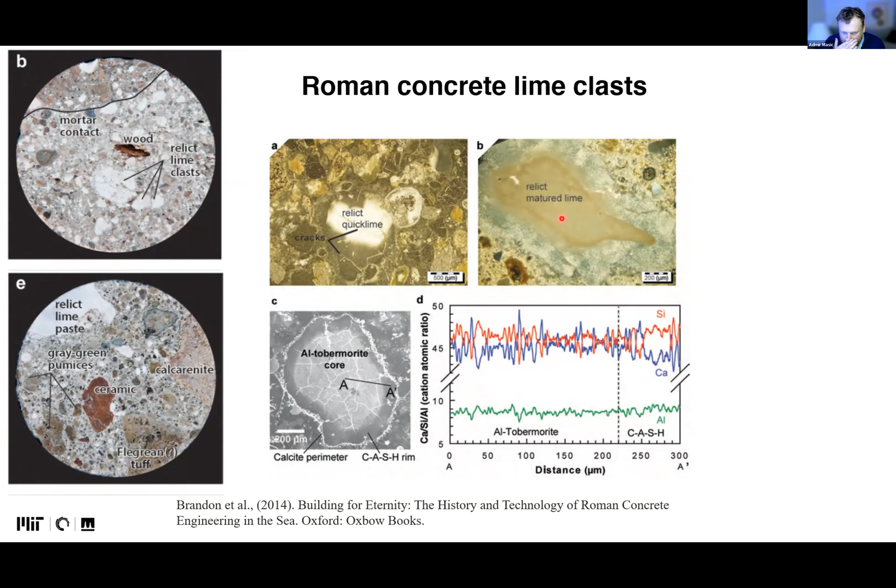Are these relict lime clasts—which were thought to be only products of bad mixing of the concrete and would remain there inert, more or less? But what we figured out using scanning electron microscopy, and especially Raman spectroscopy, as we looked into this, is that these are not uniform, and also show very specific phases.

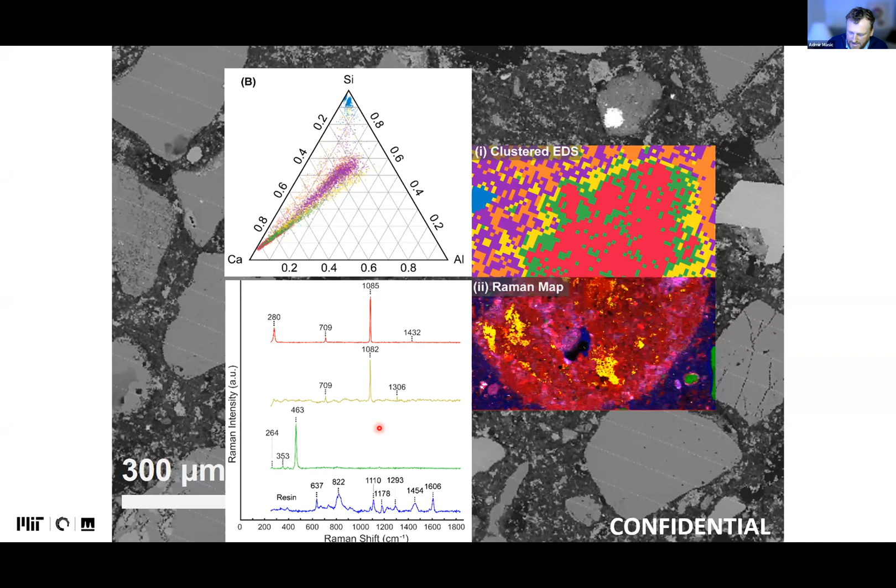In this case, this yellow phase is different from the red phase, because you see big shifts. We were able to correlate these yellow phases to a process where, instead of using slaked lime, Romans might have used partially quicklime.

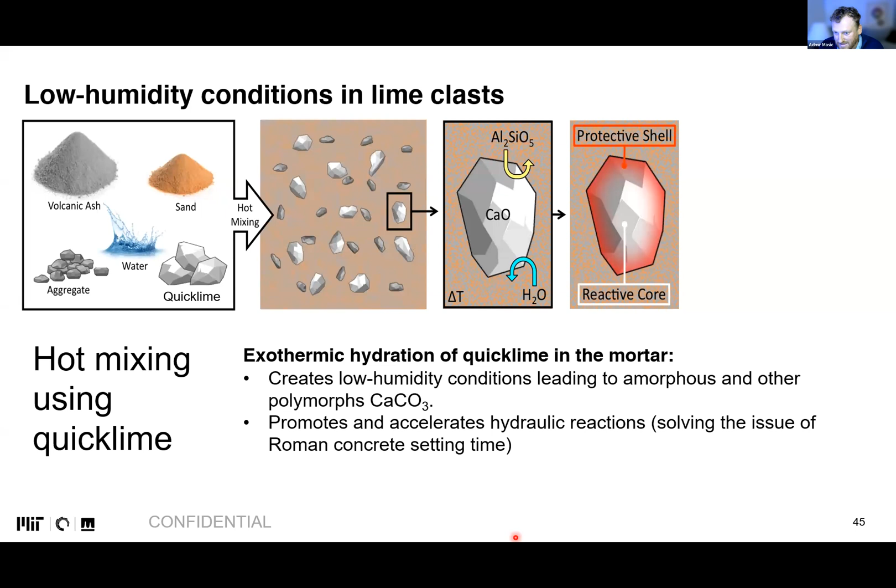This hot mixing, a well-known process, could introduce new features, including lime clasts, into our concrete mix. That was really exciting, because we tested it in a standard ordinary Portland cement situation, and it's really what happens. If you systematically create these inclusions that are potentially a source of calcium for all the reactions we observe, you produce something that incorporates reservoirs of agent that eventually lead to some reactivity over time.

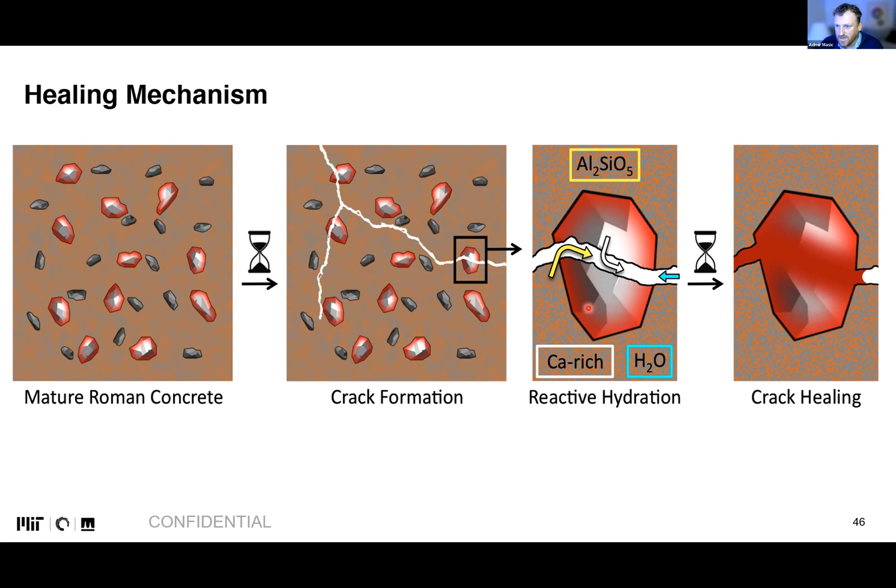We protected this with a patent that then led to a new startup that you might hear of soon, and eventually...

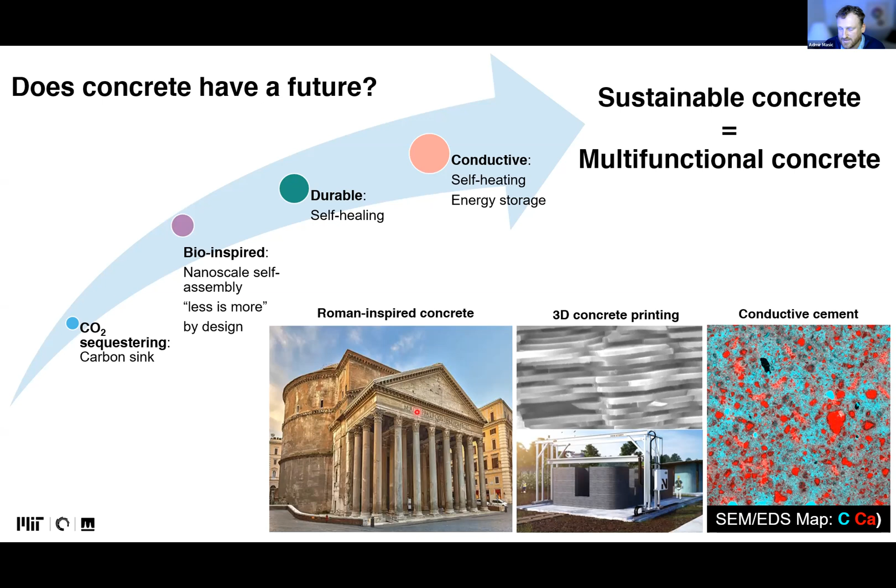I would conclude with this final slide where I really believe that sustainable concrete with multifunctional features might be the key to creating something that is not only structural, but also maybe leads to 3D printing, or you have seen the potential of conductive cement, maybe create batteries, and of course if we do all this through a self-healing material, it's really an exciting field to tap into.

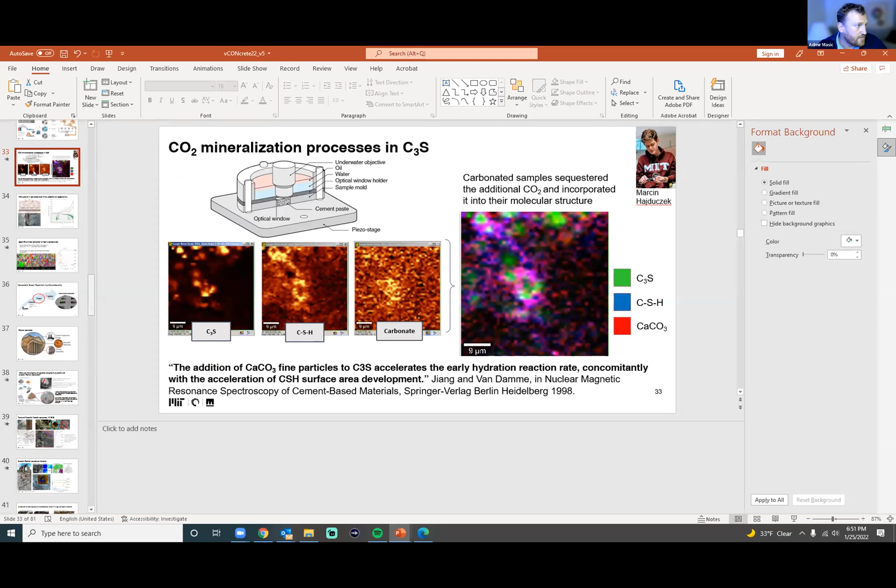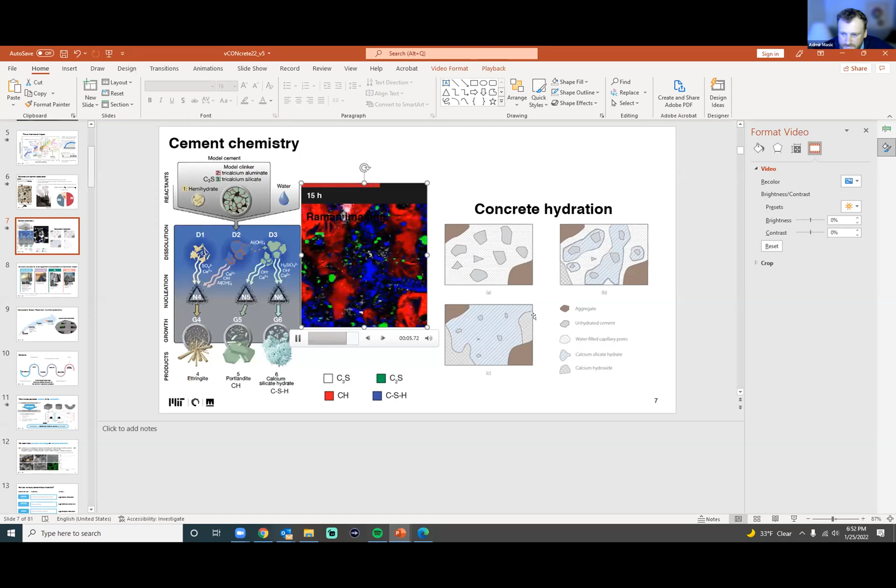You need to realize that this is 100 microns, okay? So some bigger grains of C3S will probably be around that we didn't capture in this specific image. And of course, we analyzed all this.

He's talking about C3S, yeah, that's what we are talking about. But here we did this kind of analysis, and you see C3S, for example, cluster size and volume fraction. Indeed, it does go quite low quickly. You are right in this specific case. It's again this image, okay?

But I'm sure that there are aggregates that do not react, because you have seen it here, for example, that is still there.

One more question: a very insightful presentation for the self-healing understanding of Roman concrete. Have you been able to mimic their volcanic ash-based concrete mix? And is there any indication of the lime cycle in their concrete?

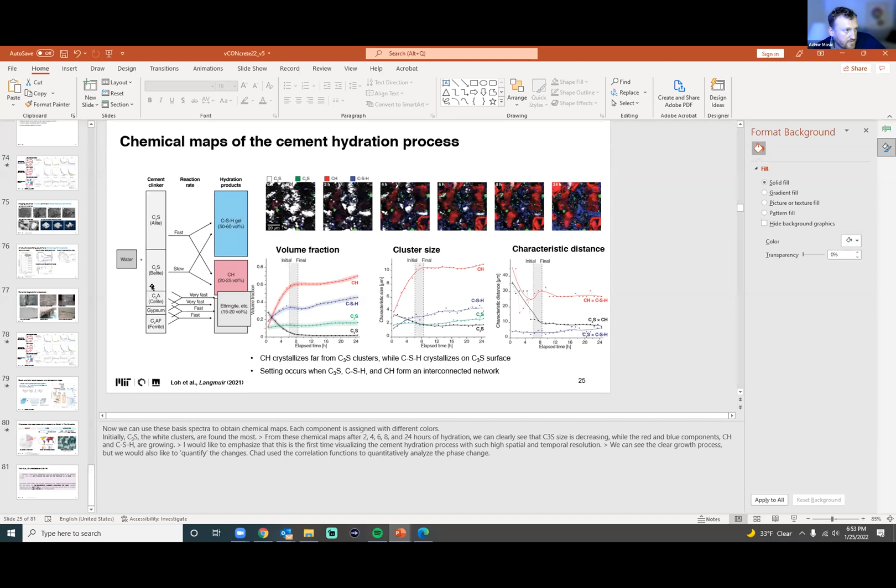Oh yeah, this is really a great question. We know more or less how Romans made it, and we follow Vitruvius. I have a great slide that I took out because of time about how we reproduce Roman concrete - we look at Vitruvius's ten books of architecture and translate from Latin what he says. For example, here it says: therefore, when three substances formed in a similar manner by the violence of fire...

Three substances, basically volcanic ash, lime, and what is the third one? I think in this case it's some additional aggregates that they would put into one mixture and take on the moisture all at once, including the lime. They cohere, and therefore, when unlike and unequal substances are caught together and brought into one nature...

The hot desiccation suddenly saturated with water basically leads to latent heat in the bodies affected, and causes them to combine vehemently and gain rapidly one strong solidity. This is our kind of interpretation of these books and translations, and this is where we start.

We in theory know how they would do it, but there are some details that we actually lost over 2,000 years. Now putting volcanic ash there is definitely key for the certain type of reactivity.